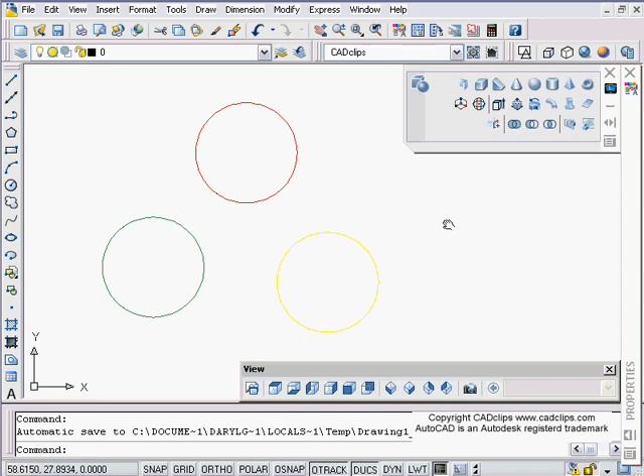I've got some solids here. If I list this, I've got a 3D solid and it's a cylinder, and I've basically copied it 3 times, and all I've done here is change the properties, change the color of these objects just so they stand out a little bit. Nothing fancy there. Then I can go into a 3D view and change my visual styles as I please, and using shift middle mouse button, I'll pan around here.

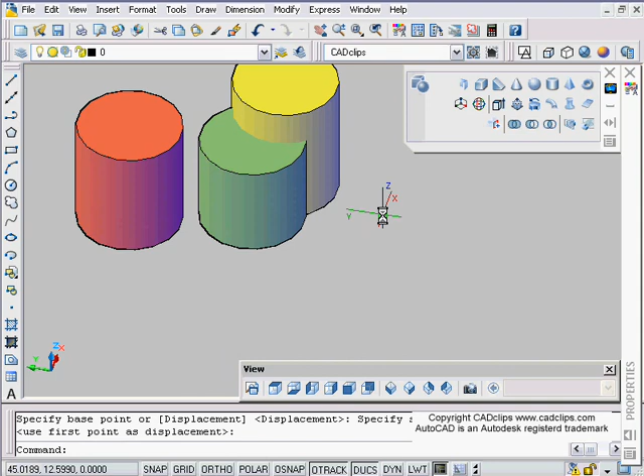I'm going to cause these objects to kind of interfere with each other. So now that I can do this in 3D and know where I am, I can say, okay, I'm going to move that one over there, and then take this guy and move that guy over there. I can go back into my wireframe if I want.

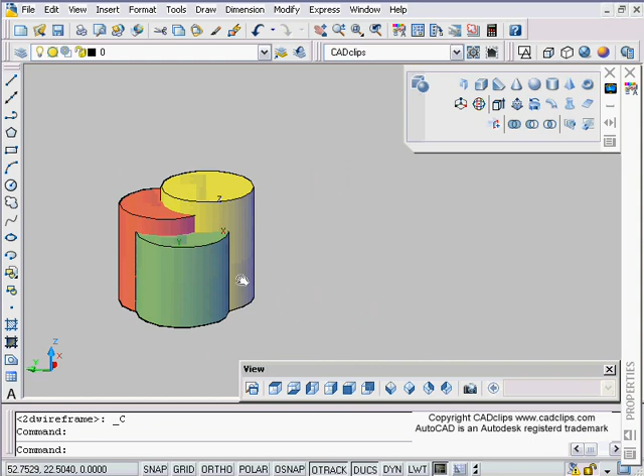I can go back and look from the top. I've got some areas that interfere. So all I can do is go back to a 3D view, maybe change my view to get something a little more conducive to the eye, and then now I'm going to use my interference checking by starting off.

Now I need to go into here, by the way, and expand this down. If you don't see this, there's our interference checking icon. We click on this, we read our command line, and it says select the first set of objects.

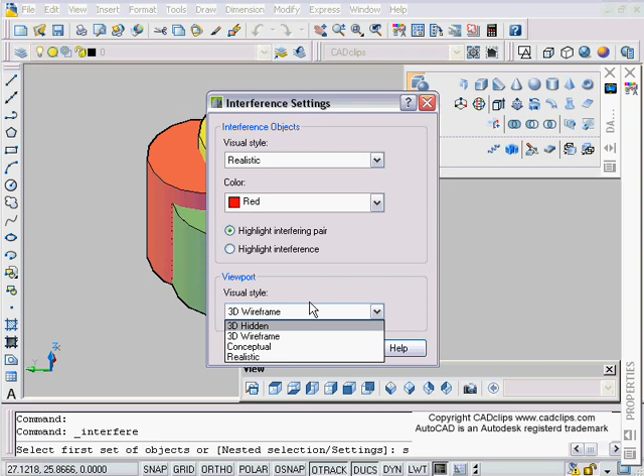There's an S for settings, and we can type S for settings, and say how it's going to display. We're going to see that a little bit later, and also it's going to show the visual style, how we want it to display. 3D wireframe is actually good, and you'll see why. So just a couple things there under settings.

All I'm going to do is pick this yellow guy, and hit enter. Select second set of objects, it says. So I'm going to pick these 2 guys here and hit enter, and it bumps me into a wireframe, as I had mentioned earlier. Now from inside of here, I can pan this stuff around and zoom around if I want. Maybe auto hide that.

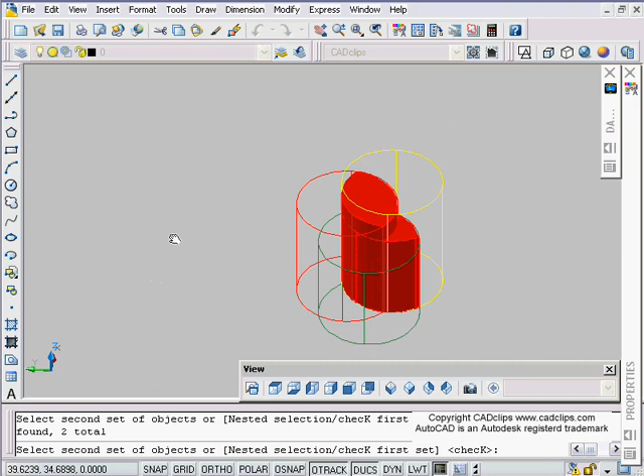As soon as I hit escape, my interference checking dialog box comes back, and now what I can do is say next and next, etc. Zoom to pair. If I take the zoom button off, now what happens is, if I go back into here, for instance, pan, I can zoom out, move that off to the side, hit escape, and now when I go next, next, next, it's going to find those objects previous.

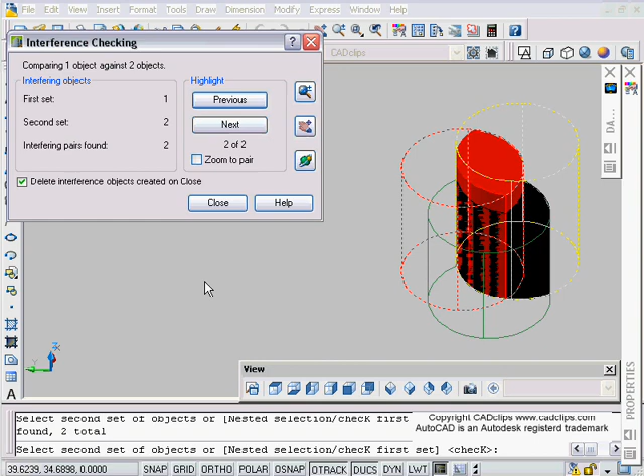Now when I close this off, it can make actual solid objects out of the interference areas. There's 2 sets of interference objects. So delete interference objects - I'm going to take that off, which means don't delete them, which means create them. And then I'm going to hit close. And that's it. The job is now done.

Now if I say M for move and I hover around, guess what? I can move that one out, and then M for move again, pick and slide that one out. And those are my interference objects. So you can do that with all different types of solids.

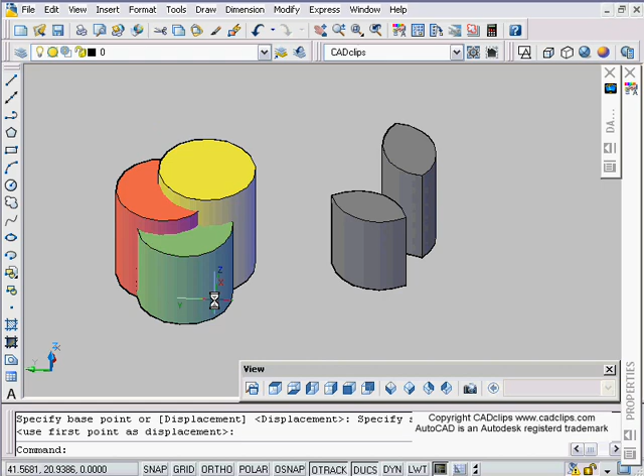Back to my dashboard. Maybe take my auto hide off once again. Now maybe I will pick this one, enter, and then I'll pick these 2 to compare, enter. I can get inside of there, zoom to pair, etc.

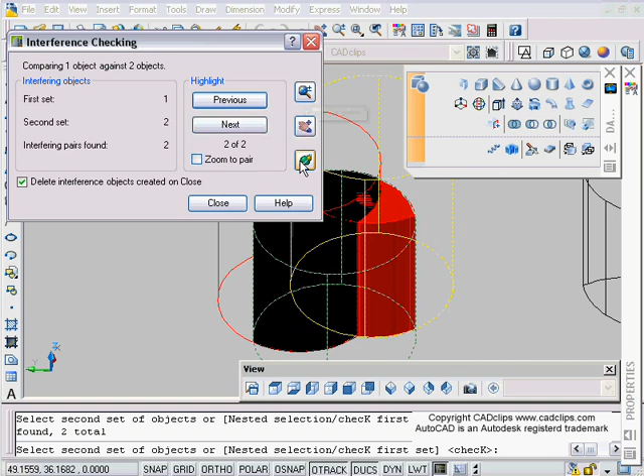Previous, next, next, etc. Use your zoom buttons over here. It's not complicated. Take your delete off, hit close, M for move. Pick this guy, move him over, M for move again. Oh, and then maybe that's getting cumbersome.

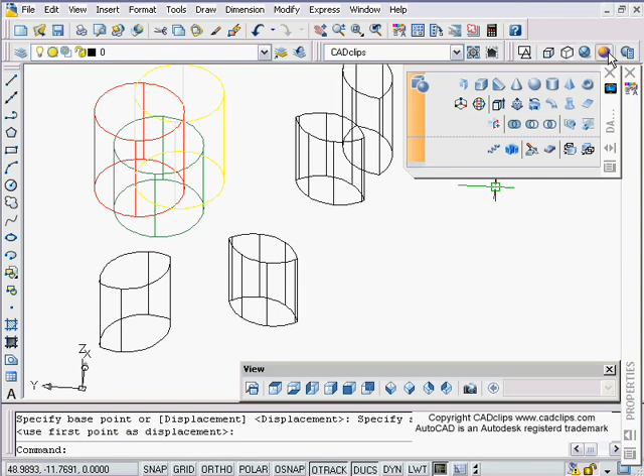I'll switch to wireframe, and then it might be easier to grab that little guy that I created, move him over there. So it's up to you how you do it. All it does is compare the objects, and it gives you 2 sets to compare, and then it makes the interference objects, and that's about it. Easy peasy.